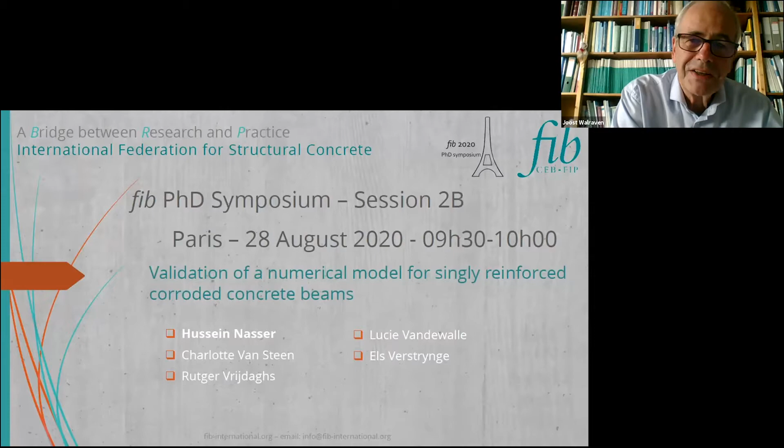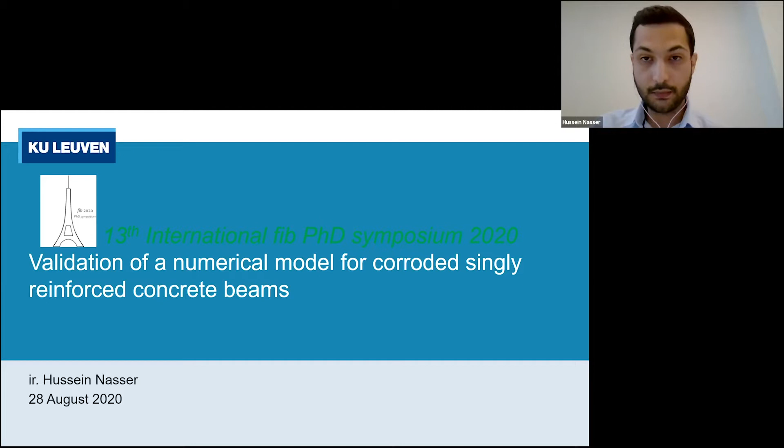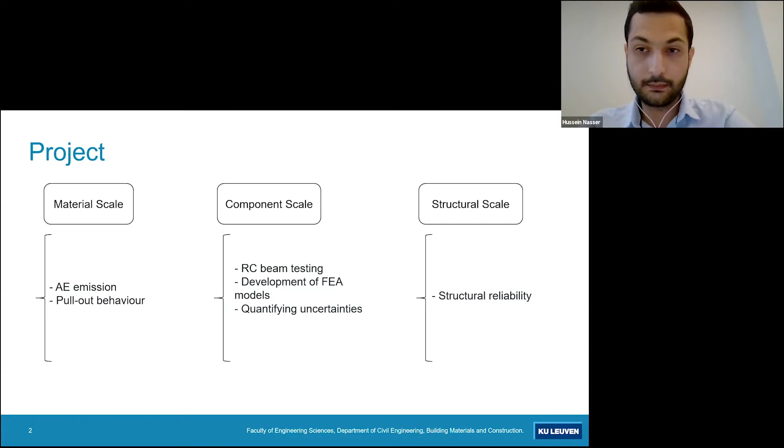Today I will present a part of my research project, which deals with corrosion damage in reinforced concrete. I will specifically talk about validation of a numerical model for corroded singly reinforced concrete beams. Before I start, I'd like to mention that my research project is a part of a larger project, which deals with different topics related to the assessment of corrosion damage in existing structures. Topics include acoustic emission monitoring of corrosion, pullout behavior, experimental and numerical modeling of reinforced concrete beams, and structural reliability. For my part, I deal with experimental and numerical studies on reinforced corroded concrete beams.

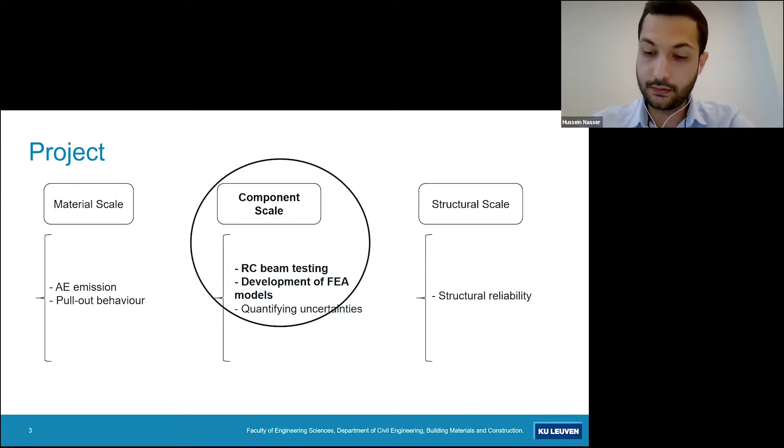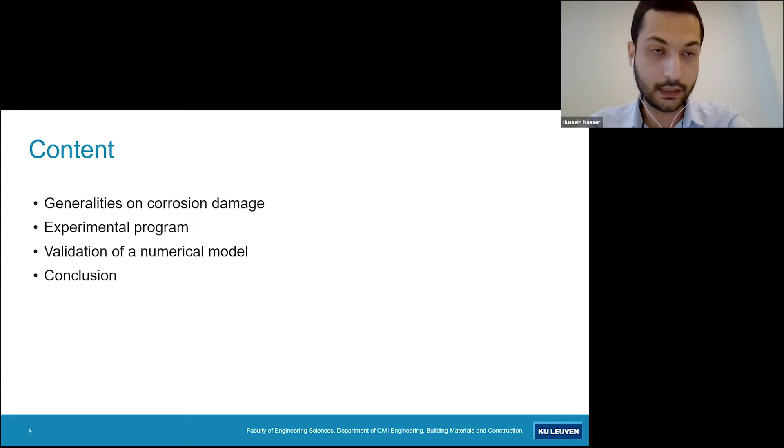My presentation will be divided as follows. First of all, I'm going to talk a little bit about corrosion damage. I will give a brief discussion about the corrosion process and the damage which is formed due to it. After that, I will present the results of my experimental program. Afterwards, I will give a validation of a numerical model based on these experimental results. And finally, I will draw some conclusions.

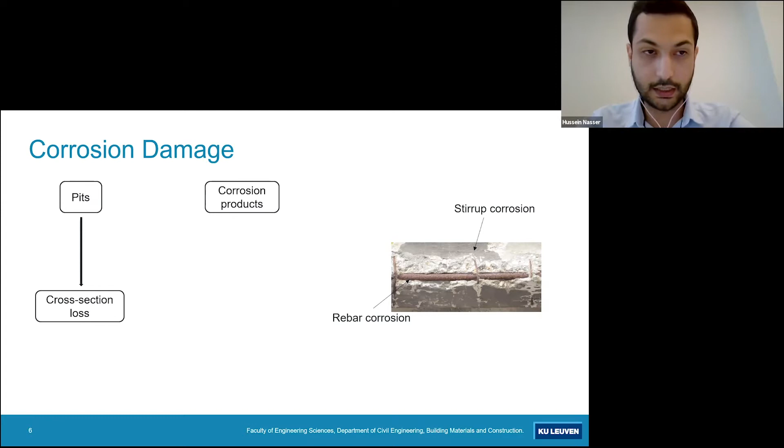In reality, concrete is supposed to protect the steel from corrosion. However, if chlorides come in contact with the concrete and penetrate to reach the rebar, a corrosion reaction can initiate. This corrosion reaction leads to the formation of pits and corrosion products. The formation of pits will lead to a reduction in the rebar cross-section, while the corrosion products will penetrate into the pores of the concrete, causing radial pressure and eventually lead to cracking and spalling. This process also deteriorates the steel-concrete interface, leading to bond loss.

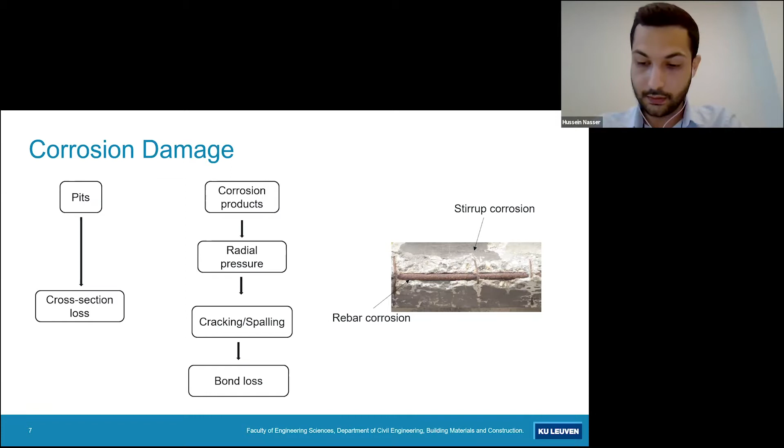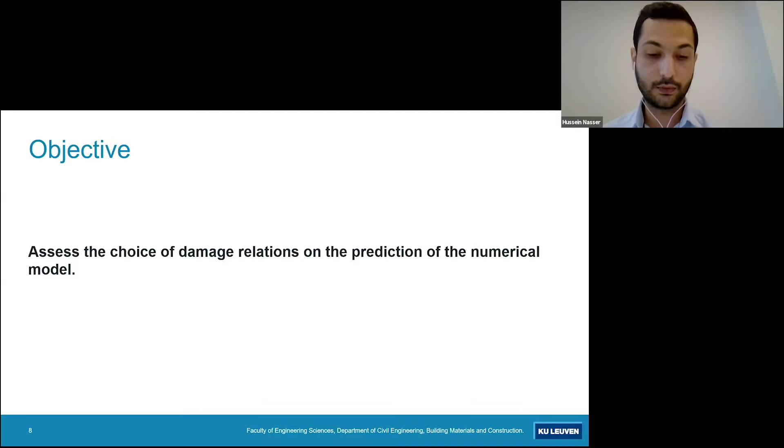Therefore, it is important to take into account the damage related to cross-section loss and bond loss in order to be able to predict the structural capacity of corroded reinforced concrete beams. So the objective of the following presentation is to assess the choice of damage relations related to both the cross-section loss and the bond behavior on the prediction of a numerical model, which will be validated on experimental results.

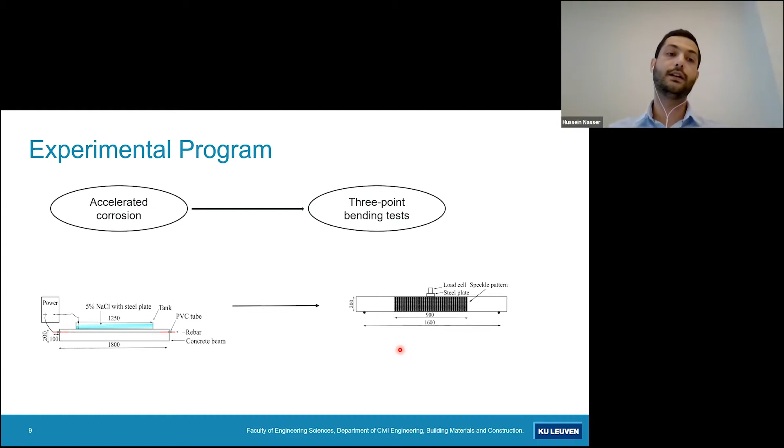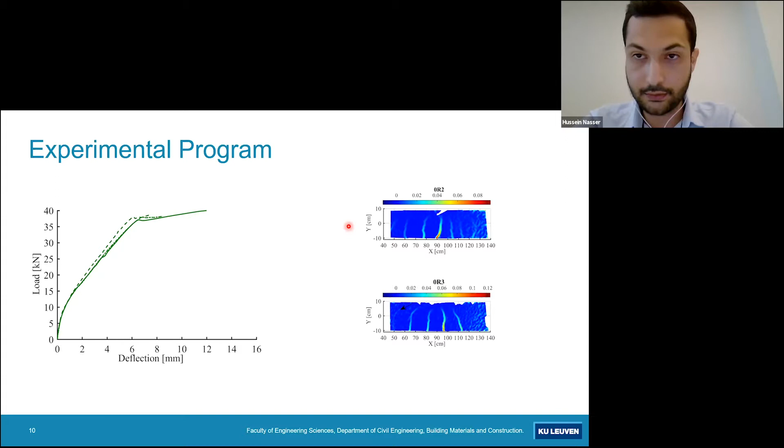I will present first the results of non-corroded beams. I tested 3 beams, and the average bending capacity was around 37 kilonewtons, as shown from the strain field obtained through DIC. Well, I only present 2 of the beams. The beams developed multiple flexural cracks that are closely spaced.

If I would move now to the corroded beams, I will discuss first those that have reached 5% mass loss of steel. It can clearly be seen that corrosion reduces the bending capacity and the stiffness of the beams. It's also noted that one of the beams, the curve which doesn't show a distinct yield point, developed a splitting crack, which indicates bond failure due to bond deterioration. So not only does corrosion reduce the yield capacity, it also changes the failure mode from yielding to formation of splitting crack or debonding crack.

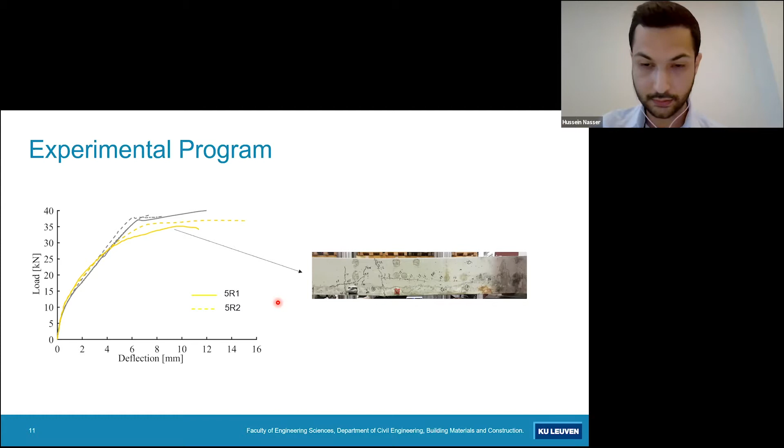Going to the beam that reached the highest corrosion level, it reached 15% of mass loss. The beam failed by yielding, but it didn't show formation of excessive splitting cracks. Therefore, it's possible that higher corrosion level doesn't necessarily mean a higher level of bond deterioration.

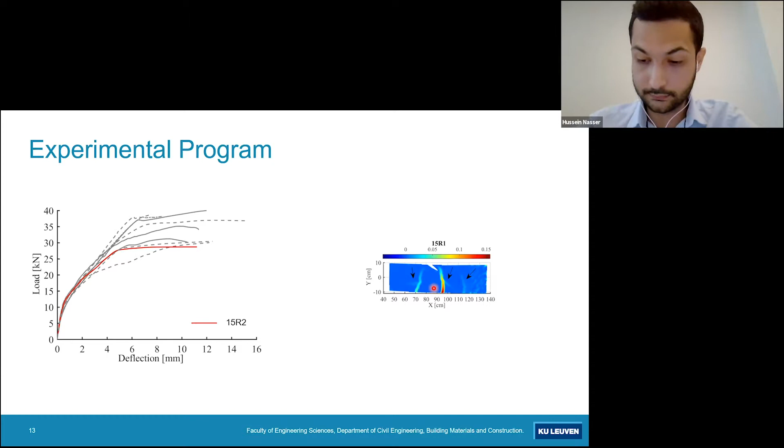Therefore, corrosion causes reduction in the bending capacity due to the formation of pits and the cross-section loss of the steel. It also, due to bond deterioration, can cause a decrease in the number of cracks and the formation of splitting cracks. Both types of damage are necessary to be taken into account in a model.

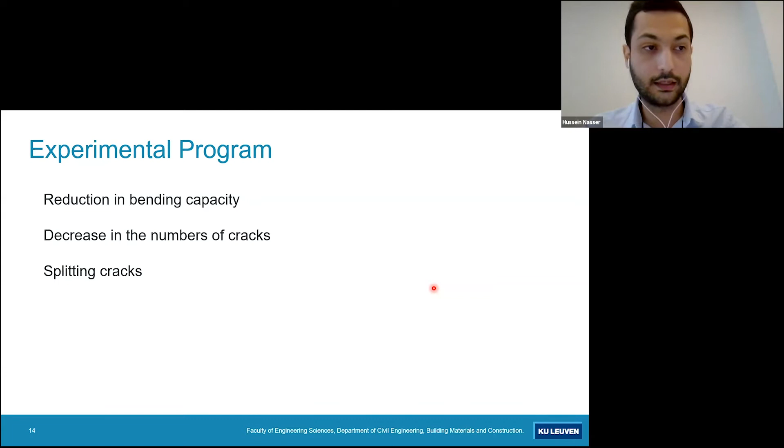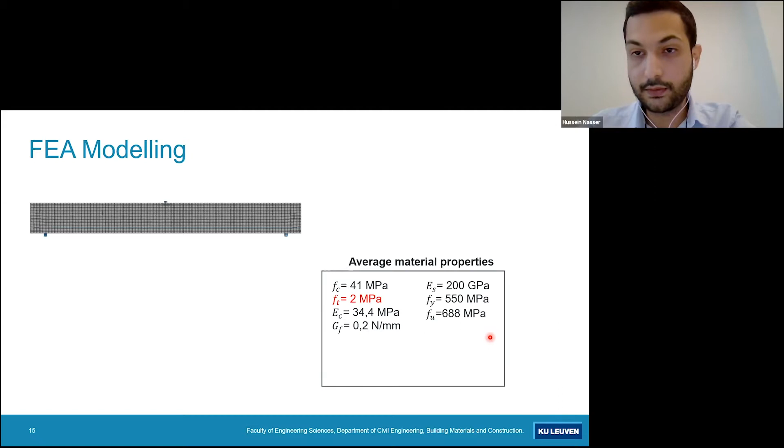After discussing the experimental program, now I'm going to move to the numerical modeling, which will be validated on the load deflection curves and the DIC results of the cracking patterns. The model was built in Diana using 2D plane stress elements. The average material properties related to the compressive strength were used, calculated from tests on cubes, while the characteristic uniaxial tensile strength was used. I used grade 500 steel, so I used the average values of that type of steel.

As for the cracking model, I noticed that if I use a rotating crack model, the model would predict the formation of a shear crack, which was not observed in the experimental test, while a fixed crack model shows a more stable behavior of the cracking. I explained this by the fact that a fixed crack model includes a shear retention factor, which plays the role of aggregate interlock and can actually stabilize the formation of shear crack, especially if those beams have no stirrups.

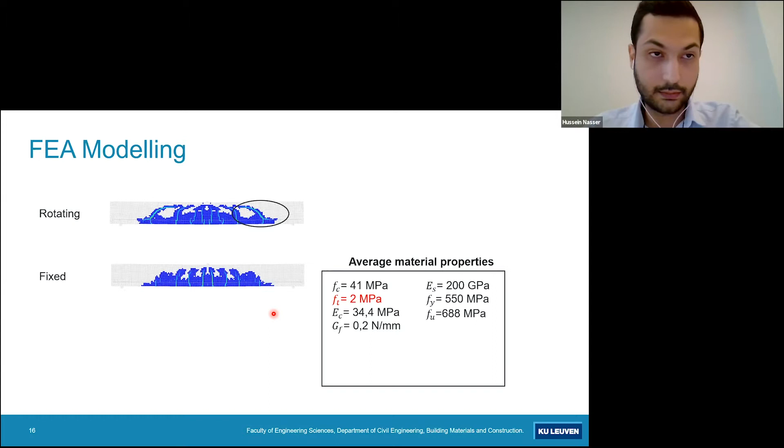So after introducing the model, the different material properties and the cracking models used, it can be seen that a good validation has been obtained. The validation was done on the load deflection curves of the non-corroded beams. And the numerical cracking pattern was also compared to the cracking pattern obtained from DIC, which shows multiple cracks that are closely spaced.

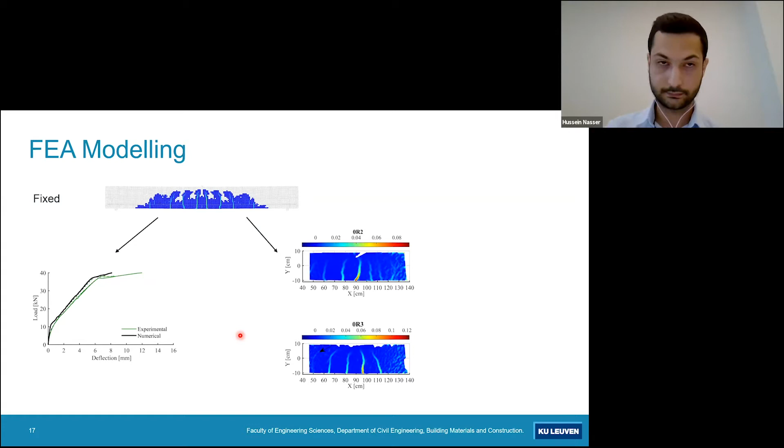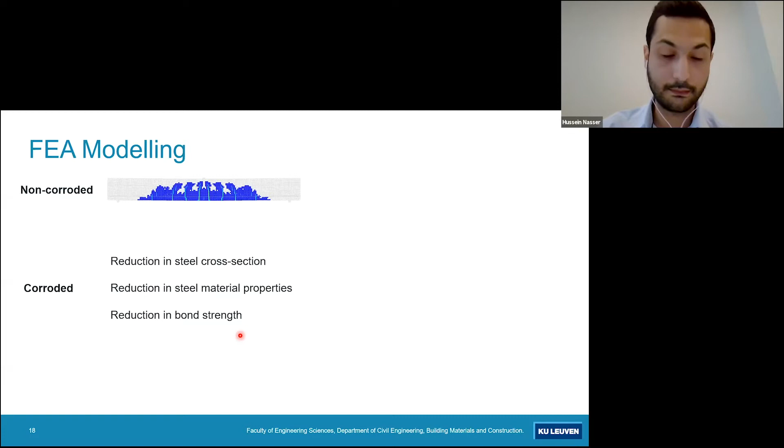After validating the non-corroded beam, the corroded beams were modeled using reduction factors. The reduction will apply to the cross-section, the steel material properties, and the bond strength. In the following slides, I'll explain how these reduction factors, or damage models, were chosen. The reduction of the steel cross-section was measured by extracting the steel from the concrete after the bending test and cutting it into pieces of 20 centimeters. In this way, I can obtain the variation in the cross-section loss, and also the average cross-section loss of the full rebar.

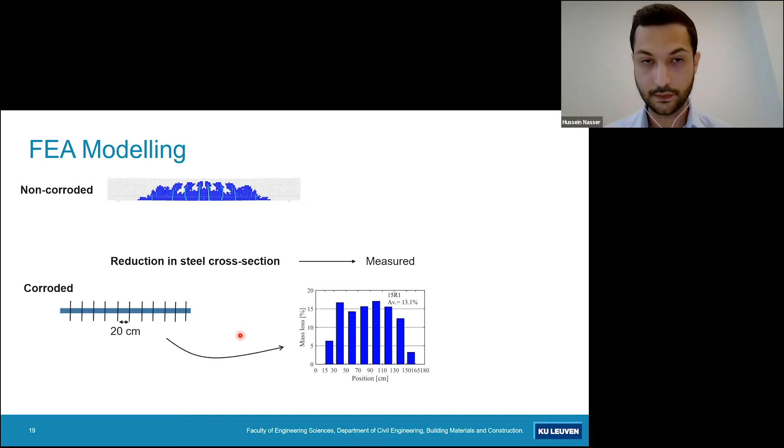It's not enough to, let's say, know the cross-section loss, but corrosion also deteriorates the steel material properties, namely the yield strength, the tensile strength, and also the ultimate strain. I used the model from the literature with the reduction factors shown to the left.

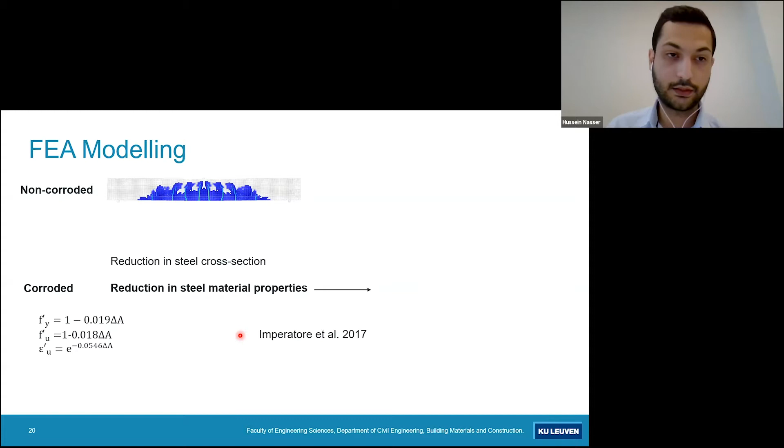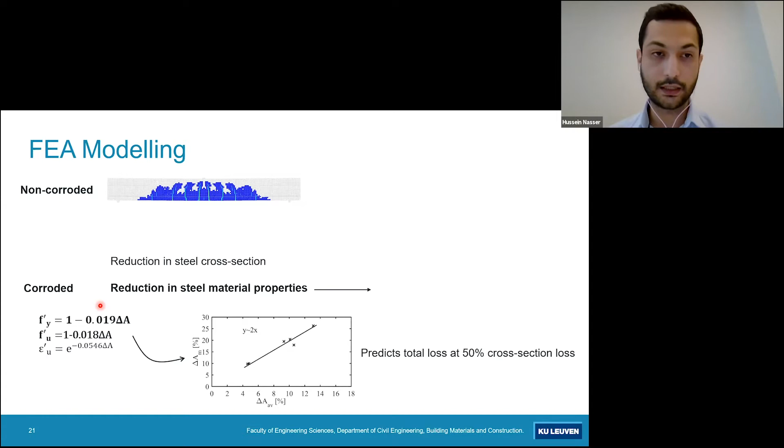If I would justify the use of these reduction factors, I found that at some points along the rebar, the maximum cross-section loss reached is double of that of the average. Therefore, it predicts that if my average cross-section loss reaches 50%, then at certain location along the rebar, 100% cross-section loss is going to happen. Taking this into account and

assuming that the maximum cross-section loss would determine the tensile strength and the yield strength of the rebar, the calibration factors of 0.019 and 0.018 correspond well to the fact that the slope of the decreasing curve predicted from the relation between the average and maximum cross-section loss is 0.02. Therefore, it's important to calibrate damage relations to reduce the material properties of steel based on the distribution of pits.

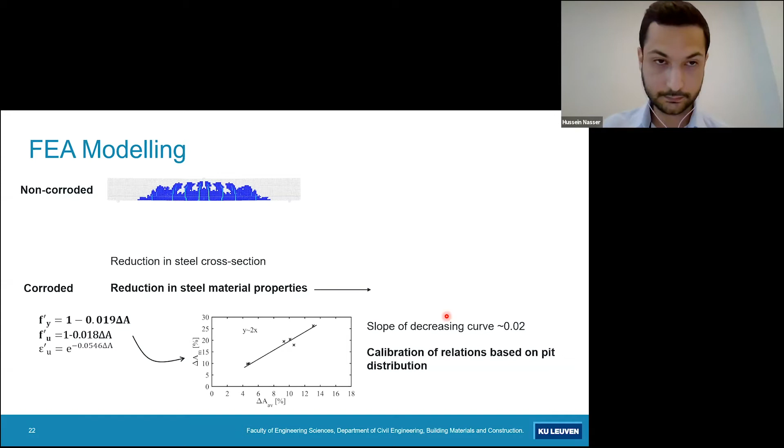Finally, I also took into account the bond deterioration. I assume in this figure here that when the concrete is not cracked, then the bond is not affected by the corrosion, whereas the moment surface corrosion cracking occurs, then a decrease in the bond strength has been calibrated according to pull-out tests. The decreasing rate, -0.2, was obtained based on pull-out tests that have been done in the framework of the same project.

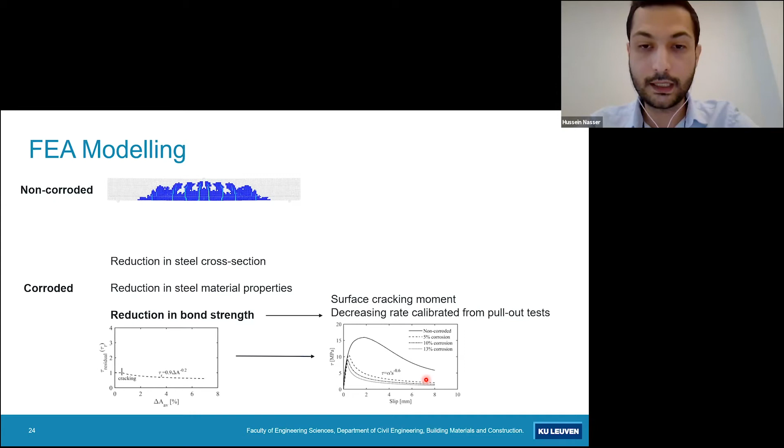After obtaining this curve, I can find the residual bond strength based on the average cross-section loss. And I can build the deterioration curves shown here based on the non-corroded curve. So if I would calculate, for example, the residual bond strength from the decreasing curve, I would correspond it to the point on the non-corroded curve, and I will build the deterioration curve based on, first of all, a linear increasing curve, and then a decreasing curve. This has been done for every corrosion level, and these were implemented in the model.

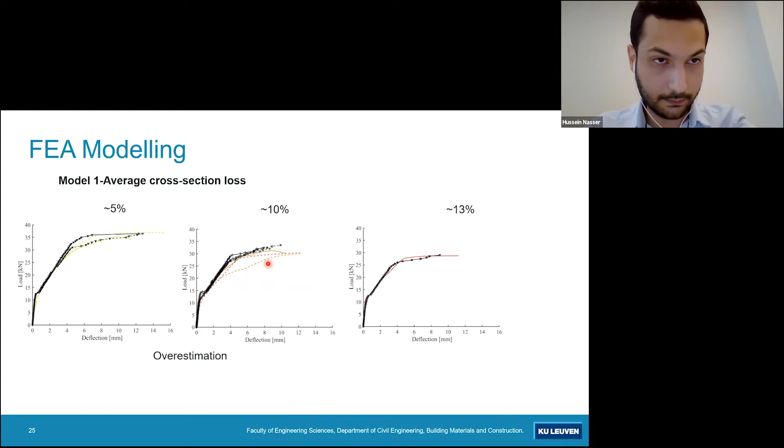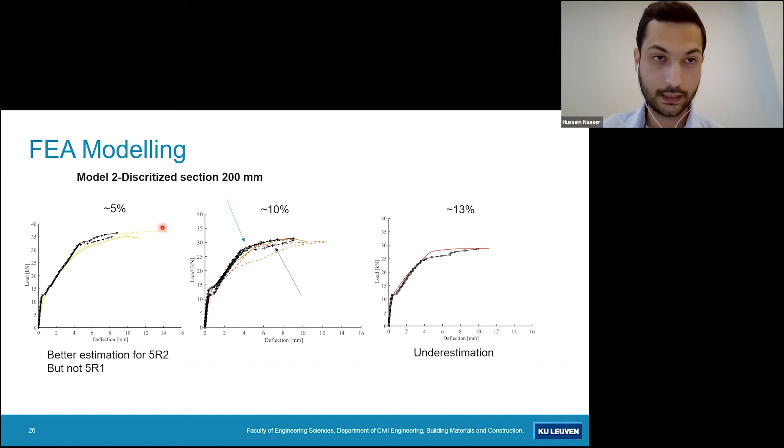It could be possible that in the calibrated bond slip curve, the slip which is taken into account is too low, whereas for a beam to show excessive slip, the calibrated deterioration curve should predict a bond failure at a higher slip value.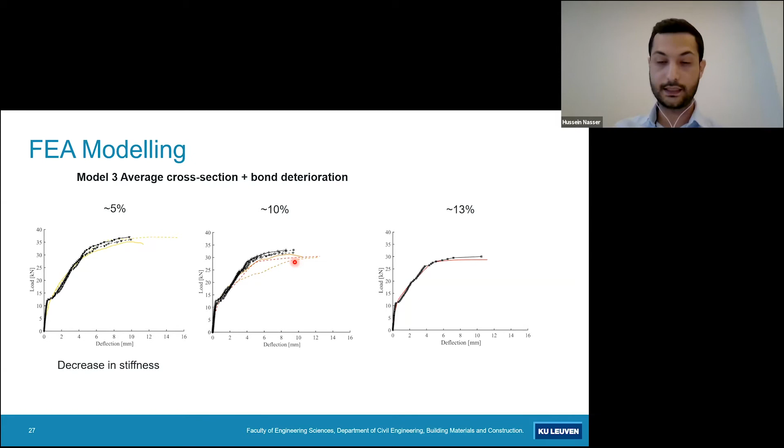Therefore, the use of a 2D beam model can predict the capacity of RC beams, and the use of the damage relations related to the cross-section loss should take into account the distribution of pits in order to calibrate such relations. And the model is able to predict the behavior to a certain degree of accuracy, yet the improvement of the model should take into account an improved bond model in order to capture splitting failure and the decrease in stiffness.

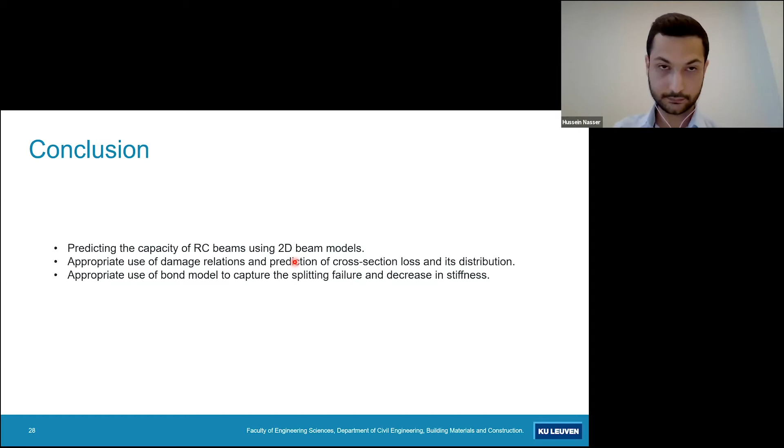Thank you. There was some comment. The first one was from George Wadi. Thank you for your presentation. How much time did the tank with the NaCl stay on the beam before the test? And the second question, did you consider a bond slip behavior in your FE model? The question was raised already before, so I think you have partially already answered, but maybe you can give some comment.

So the first question regarding the salt solution, it was there glued to the beam during the whole corrosion process. It's important because there's also a steel plate immersed in the solution. And yeah, the accelerated corrosion process would not happen if the salt solution is not available during the whole process.

Okay. For the second question, yes, I took the bond slip curve into account, as I explained how I calibrated the deteriorated curve based on pull-out tests. But I believe that the slip value where the bond failure occurs should be higher than what's predicted. If we look in the literature, normally they would say that due to the formation of corrosion products, you would see in a deteriorated bond slip curve an initial increase in stiffness, which also causes bond failure at a lower slip value.